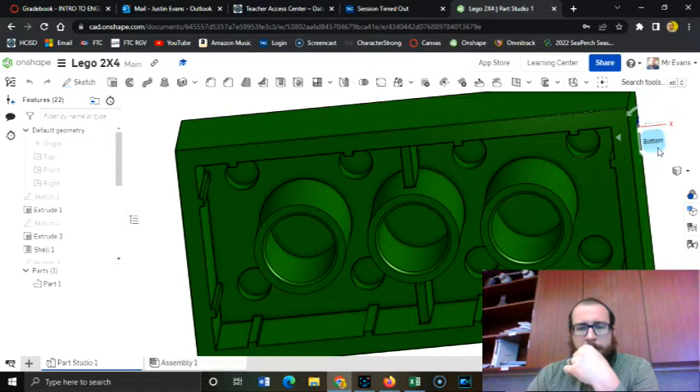You should have all your stuff on the Lego. If not, go finish that up. But hopefully you have all the stuff on, the bottom, the tabs, the little hollow circle pipes, and so forth that kind of mesh with the top of the thing.

I did put the word Lego on it. You don't necessarily have to do that, but I think it makes it look a lot nicer. And then I actually went around and put tiny little rounded edges on it, and y'all don't have to do that either. I did find this cool feature that looks really nice, where you can remove the shaded edges, and it almost makes it look even more real. But the projector doesn't show it very well. So I'm gonna put them back on because it at least emphasizes stuff a little better.

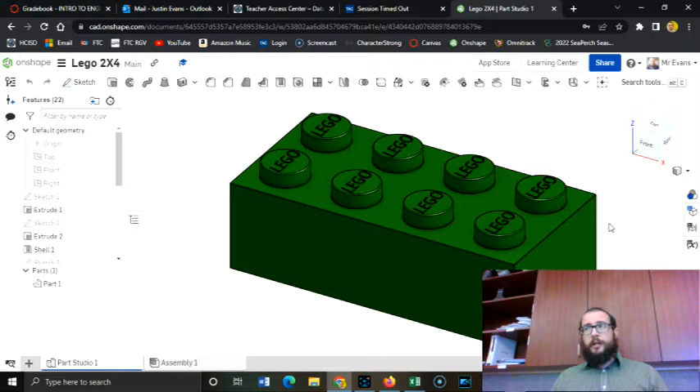So the whole point of this was so that you can practice putting dimensions yourself. So after you took time measuring dimensions and then used all those dimensions to build the Lego brick, now you're going to take those dimensions and probably even alter them a little bit and put them onto a drawing.

Now, because the way the Lego is set up, I think we're not going to do like a top, front, right. I think we should do a top, front, and then bottom, and maybe a detailed view. So I'm going to do a different drawing page than what I normally select.

So I'm going to pick, when I click the plus sign and click a drawing, I'm going to do Onshape, and I'm going to go to Portrait Inch right there.

The other thing that bothers me about Onshape is this: it sits and loads forever. It actually loads faster on mine than it tends to load for yours. To overcome that, a student showed me this shortcut: open up a second tab with Onshape, sign in, and then open up the part.

And it doesn't like to have more than one tab open. See how it says this? It won't let you do it. So if you click open, and if you have a hard time loading, open up a second tab, hit open. Wait 5 to 7 seconds. If it doesn't load, then go back to the original one and click open. And it seems to force it to load.

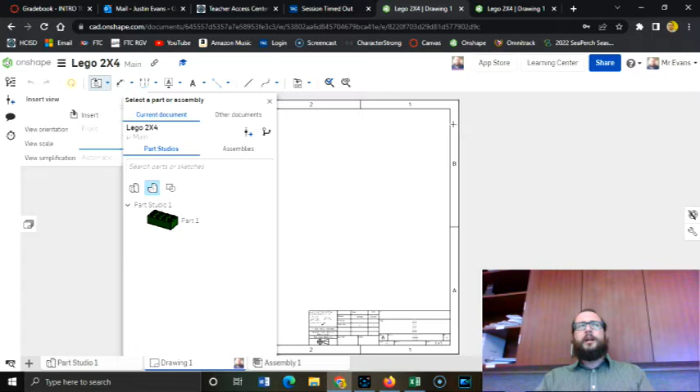I thought it was an Onshape issue. I was talking to another engineering teacher, and he said, I bet it's the actual network here creating problems. So that's what I would recommend doing whenever it doesn't seem to open up the drawing page for you. So, of course, open up the part.

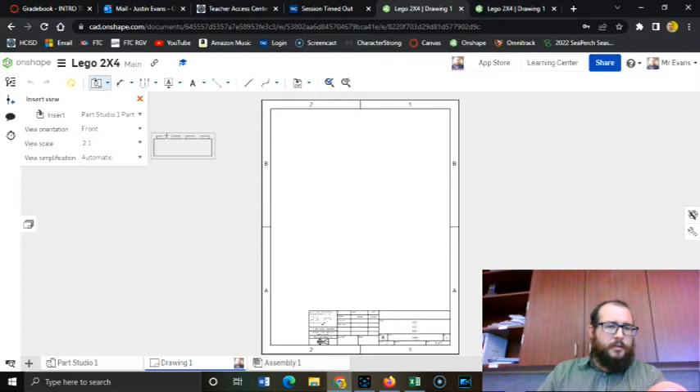Mine automatically comes to the front view, but I wanted to do a top view. You can start with any view that you want, but I'm going to start with the top view where you have the 8 pegs on the top. So I'm going to add that view, and then go down, add the front view, and then click on the front view, go down, and add the bottom view.

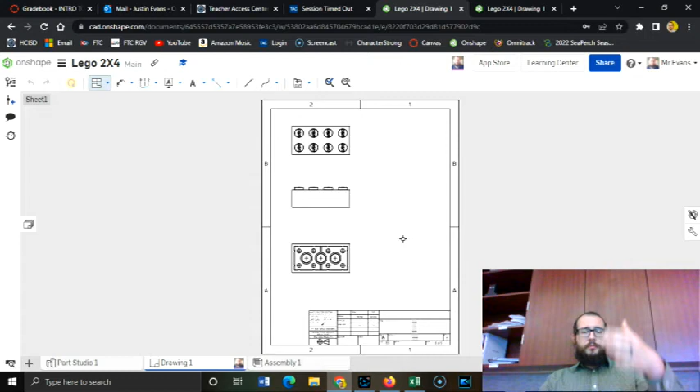Do it this way because you want them to line up. And then I'm going to click on the front view, and add like the isometric view. The reason why you want to bring them in like that, where that's called a projected view, is if I decide I need more space and move this to the side, all the views follow and stay lined up.

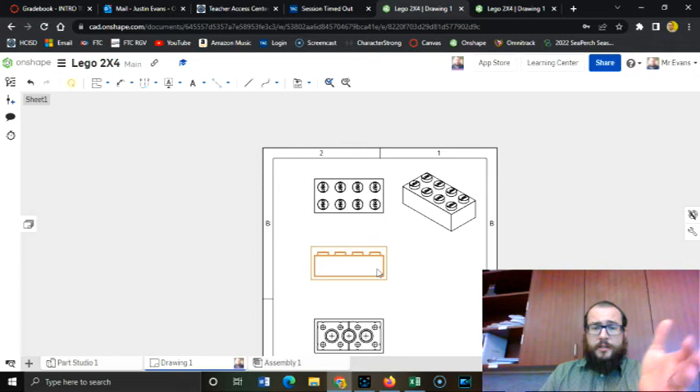Another thing that you should add is like a detailed view would be helpful. Where is it?

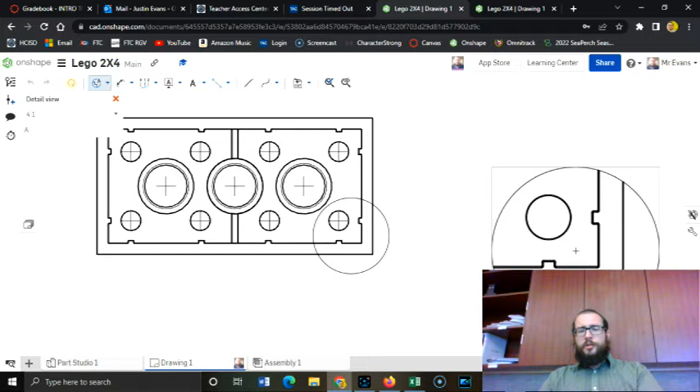It's a detailed view, and I would click somewhere around here to get that so you can add some dimensions for that piece. I don't think we would need any other views beyond those. That way you can dimension them pretty cleanly, and then you can move that wherever you want.

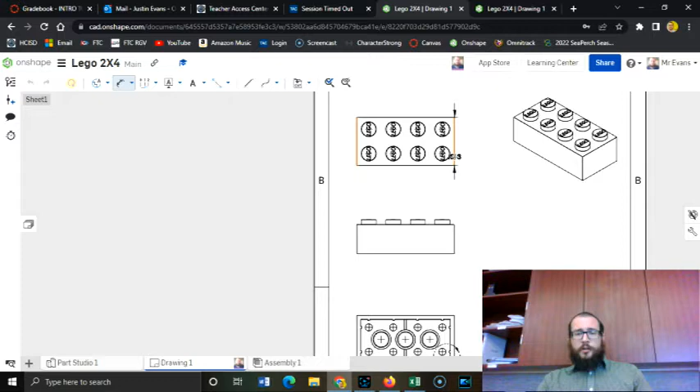There's plenty of space to fit that stuff, so you move them around as you want, and then come in with your dimension tool and start adding. I would start with your overall dimensions, and try to follow those rules I gave you earlier: the bigger dimensions should go further away. It would make more sense not to put that dimension here, but over here. And if there's a dimension you don't want, hit escape, click on it, and press delete.

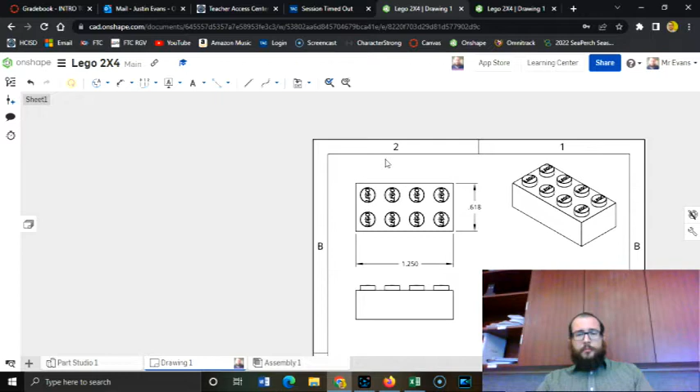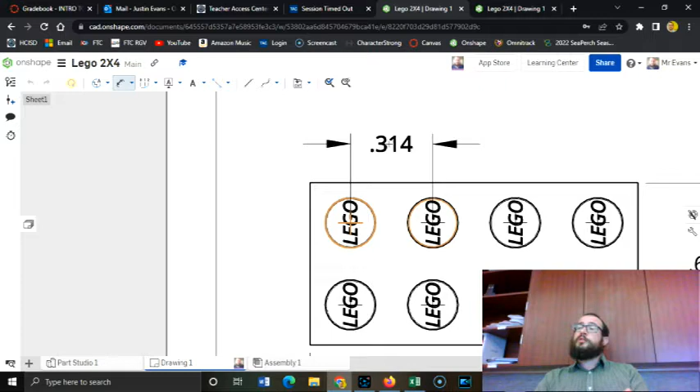Now, there's something to think about. You're probably going to have to put a few dimensions outside of it. But when we came in and measured these circles, we measured from edge to edge. It's going to want to do it from center to center, so all your circles and their locations need to be referenced to their centers. I know we measured them to their edges because we couldn't accurately measure them to their centers, but when you put it on paper for someone to make, as this type of dimension, you would do it that way.

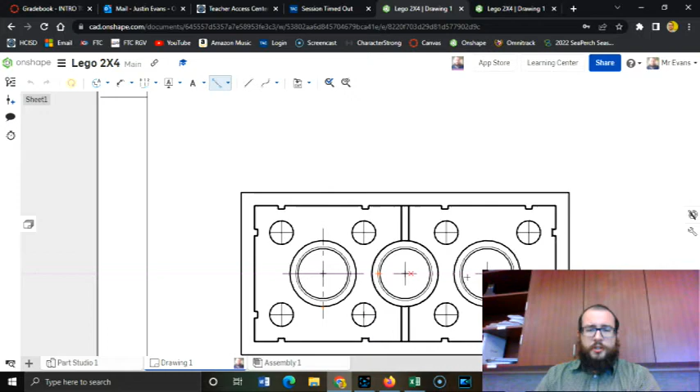Don't forget to also add in your center lines. It looks like these came in with center marks. Did these come in? Yeah, these all came in with center marks. You don't need to dimension the bottom of the eight things, you can ignore those, but do come in and extend your center lines. I'd make them bigger. Make your center lines larger for all of these things, which I know could take a while.

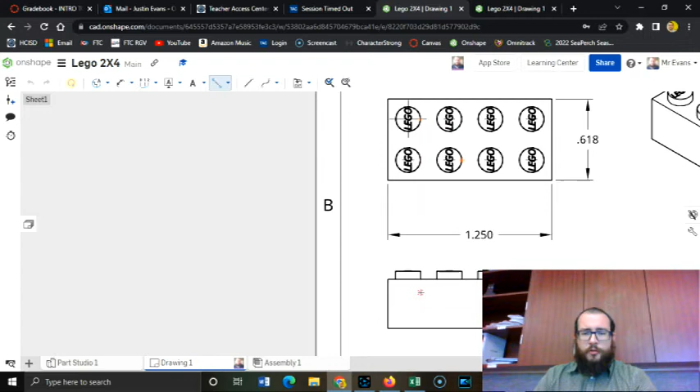Of course, crisscrossing them back and forth. Get all 8 of those. Then you can do a center line for the pegs, which would be edge to edge, center line like this.

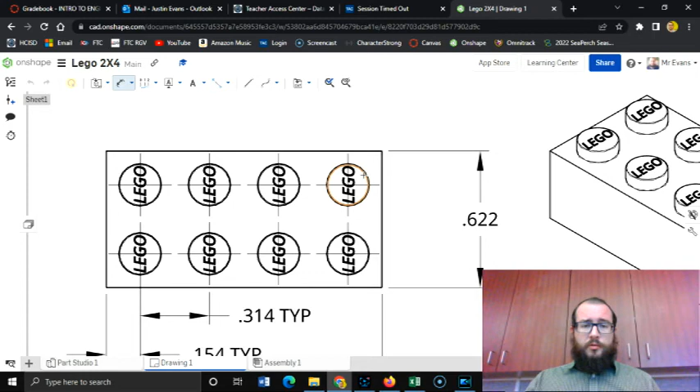I don't think we have to do hidden lines on this. I would say not, because it's going to get too cluttered. Also, after you add in all those center lines, one suggestion is to use TYP, because there's going to be a lot of things that are repeated. Let's say you put in a diameter, I put all those rounded edges—it makes it hard to select stuff. So you put in your round circle diameter for your peg.

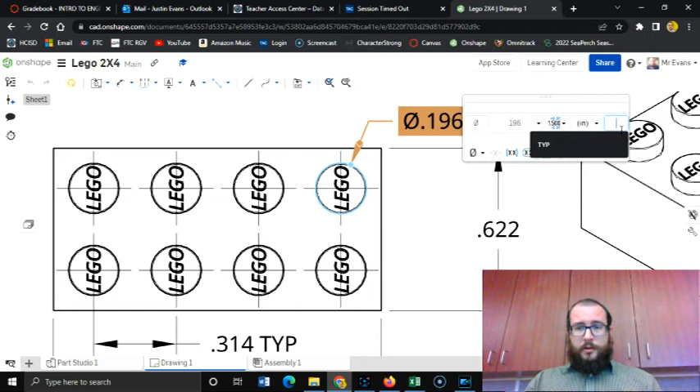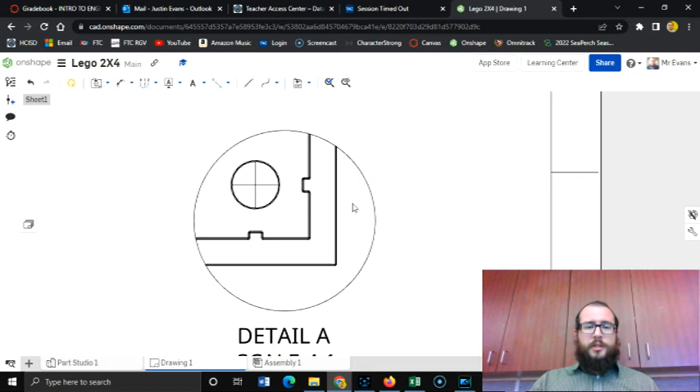When you're putting in a dimension, once you place it, if you want to change it, hit escape, double click it, and I'm going to put here 'space TYP,' and it adds a space and then puts TYP, meaning typical, so I don't have to label all the circles. I did the same thing for the distance between them, and you could probably do that with several dimensions. You would put TYP for the distance between those tabs too.

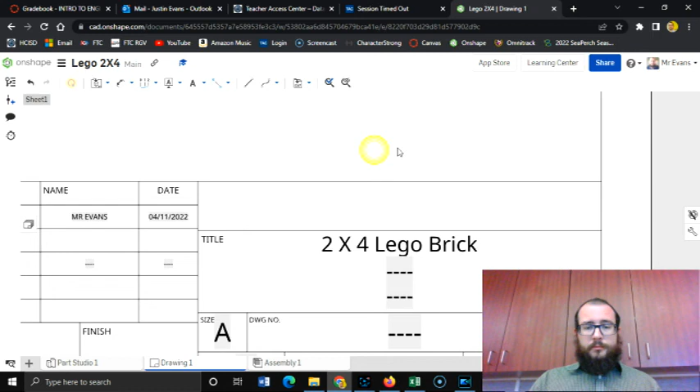The other thing you need is to put a title here. Let's put '2x4 Lego brick,' something like that. And you can put your name here if you want—your name, of course, not mine.

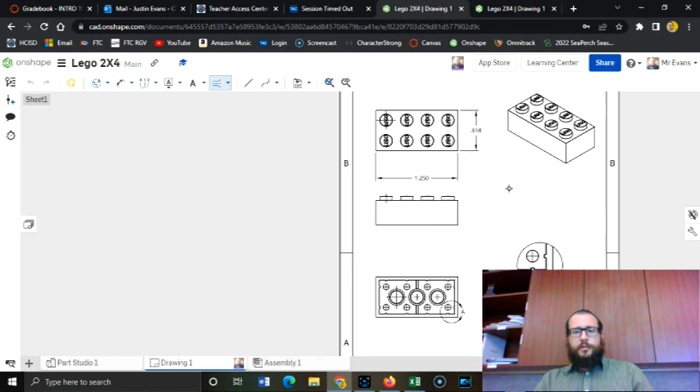So add all the dimensions that you need. Think about all the ones that I referenced in my example, and then I'll get this from you guys later. Of course, if you have questions, just go ahead and ask. And that's it. Okay.